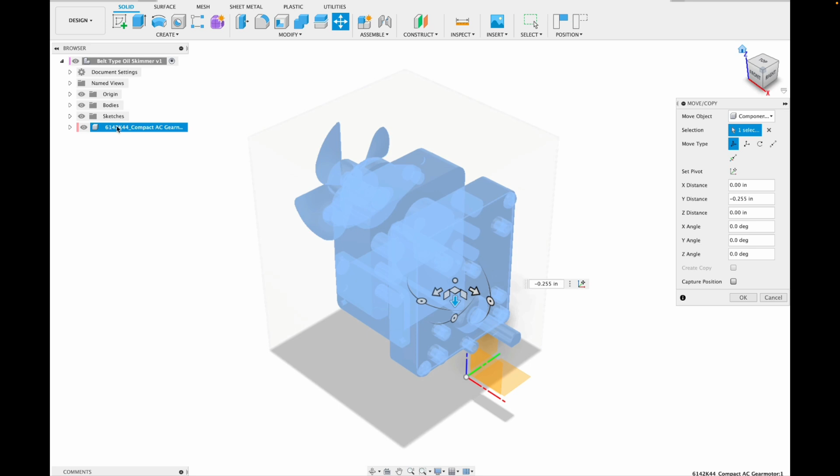For now, I want to make it clear so I can move the gear motor exactly where I want it and see inside the box. Need to leave room for my on-off switch, my strain relief. Want to keep the wires obviously away from the little cooling fan. I'll go down to metal, under the render tab, steel.

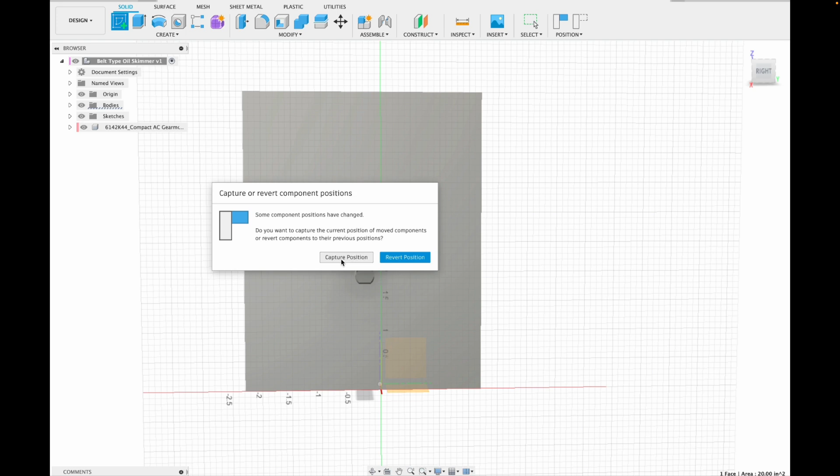And now using the shell command, we've turned it into a shell or a box. Woo! This gear motor is face mounted, so it will mount to that front wall or back wall of that metal box. It's creating an opening for the shaft to stick through. Okay. Again, trying to get it located where I want it.

I'm going to do a sketch on this face and create some through holes that the mounting screws will go through. That will actually mount the gear motor to this metal housing. There we go.

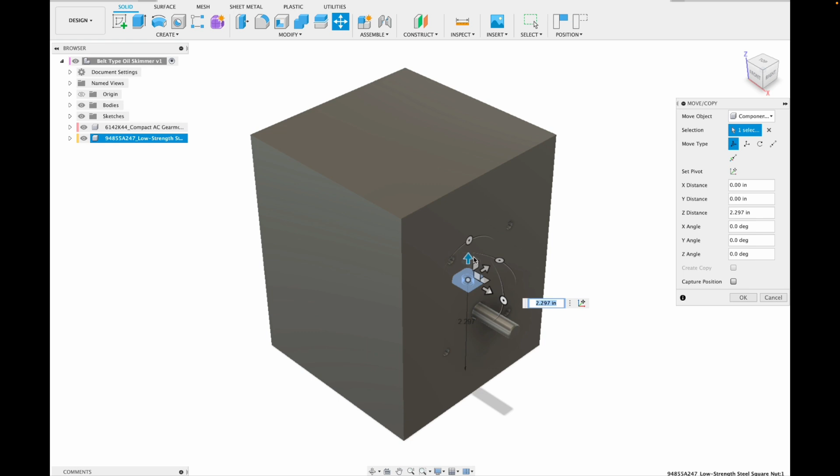And I want to create an access cover on this back side. So I'm going to bring in some square nuts, and the square nuts will get spot welded to each corner inside of the metal housing, and that will allow bolts to bolt the access cover to the housing. So there's our square nut. I'll get it placed about where I want it. And again, that'll get tack welded or spot welded to that metal housing on the inside there.

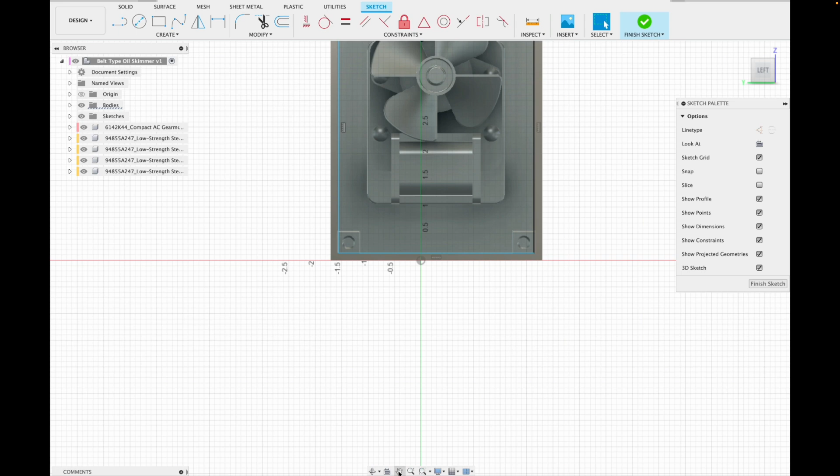And then I'll simply copy it because I need a total of 4 of these square nuts. There we go. You can see I installed them recessed 1/8 of an inch to accommodate or allow for the cover plate. Now we'll extrude out a cover plate. And make sure I say new body. Okay, 1/8 of an inch thick. And that looks good.

Now we'll hide that body that we just made. And in the render tab, I'm going to add some color to our gear motor. And to the housing, we'll paint it blue. There we go.

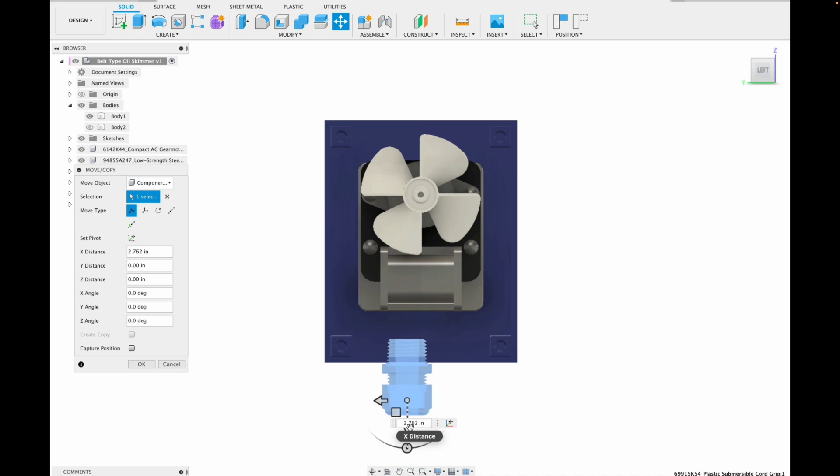Now I want to add our cord, our power cord strain relief. Great thing about McMaster-Carr, or there's other libraries where you can bring in 3D files so you don't have to 3D model every nut, bolt, screw, washer, etc. It's a huge time saver.

So there's our strain relief for the power cord. Just kind of placing it where I want it. I think I'm happy with that. It leaves room for the cord to safely come in the box. We'll paint it black. I want to bring in the on-off toggle switch.

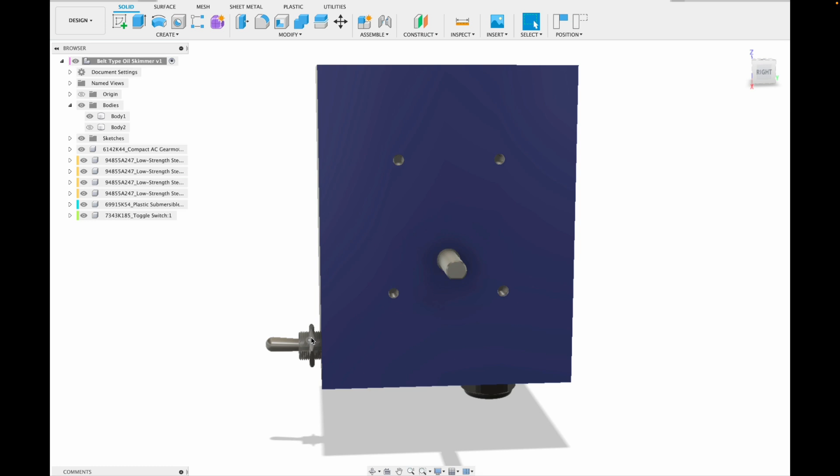And I'll just place this toggle switch where I want it to go on the side of the unit. Again, making sure I leave room for the wires inside. That looks good. Tighten our mounting nut down. There we go. In the render tab, I'll paint the body of the switch black. We'll paint the terminals copper. Chrome plating for the switch and nut.

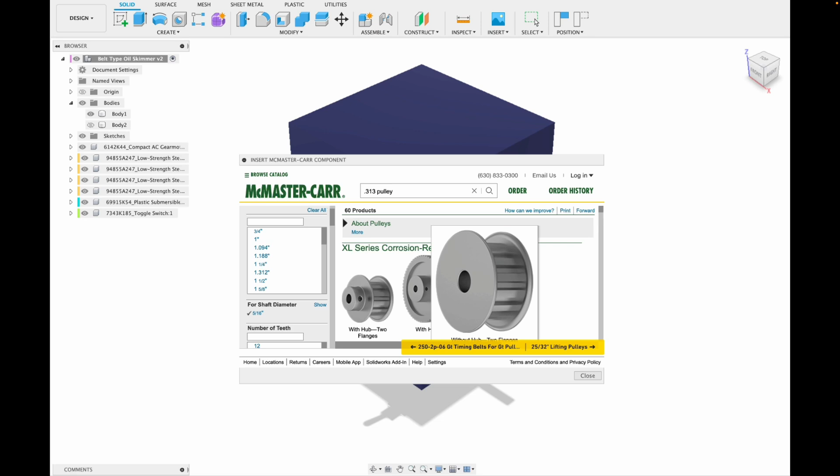So I'm going to look through their pulleys and see if I can find one that has the right dimensions for what I'm looking for. If not, I'll simply make my own pulley. So in the sketch, I'm going to go ahead and create a circle. This will be the inner diameter of the pulley. Making a second circle, this will be the outer diameter of the pulley. Finish sketch. Click extrude. We'll extrude it out to the width that I want.

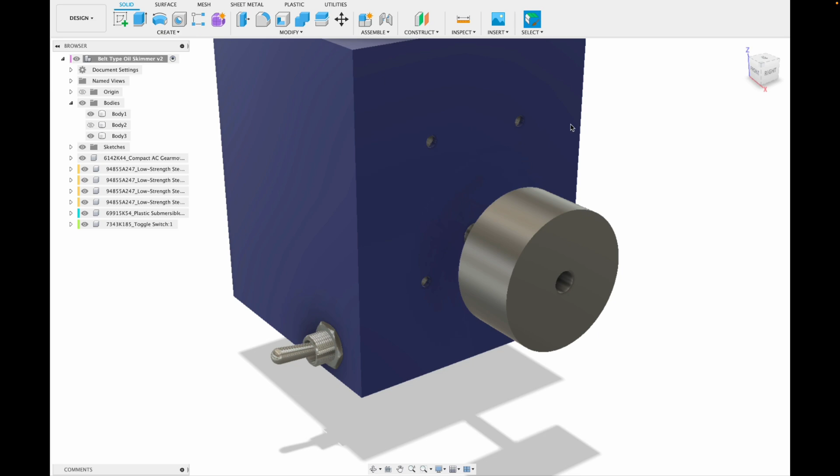I'll need to create obviously some raised shoulders or flanges on both sides so the belt stays on track. So I'll create another sketch on that face and create that flange, extrude, new body. I'll simply copy that and move the copy over for the other side of the pulley, like that.

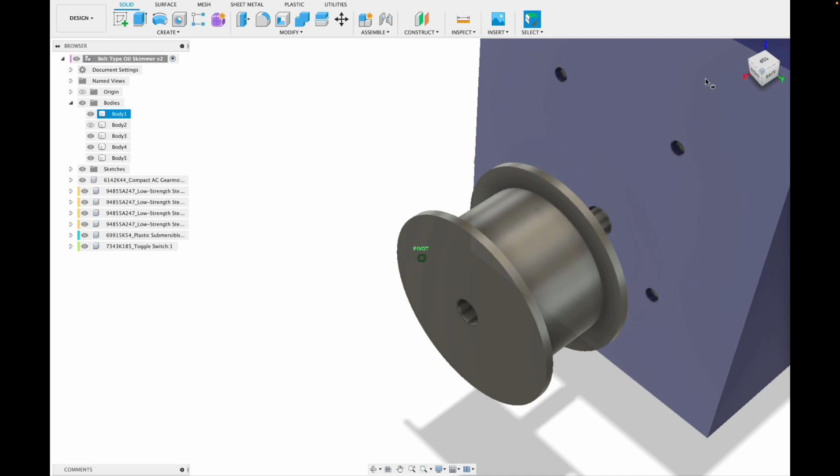I think I'm going to adjust the sketch, go from 2 inch to 1.75 inches. Yeah, that looks better. I'm happy with that. I'm going to construct a tangent plane, and I'm going to create the spikes on this drive pulley that will engage the perforated belt.

So the reason I'm creating a spiked drive pulley and a perforated belt is when the belt is covered in oil, it's going to be slippery, and I want a good way to securely grab that belt and pull it around the drive pulley. Thought about a round nub like this. That's another option, but I think I'm going to go with the spike idea instead.

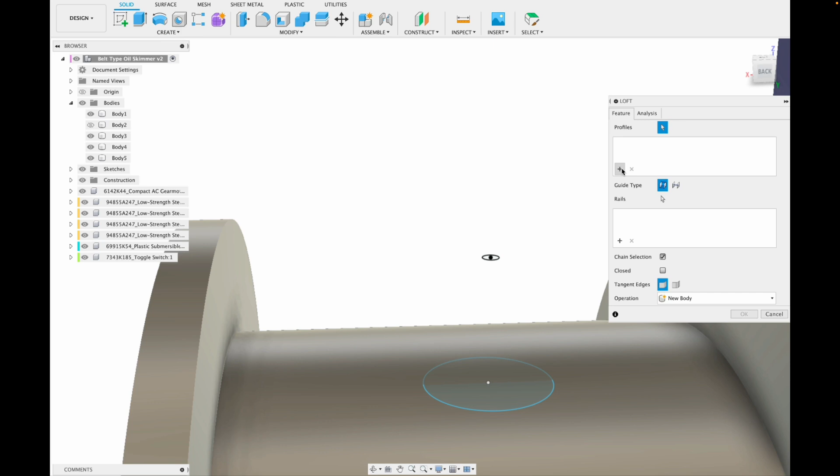So I'm going to create another offset plane from that circle and then create a tiny circle which will be the top point of the spike. Then we'll use the loft command. We'll select our 2 circles and it creates that new body for us. There we go. Going to select the body, get it centered where I want it.

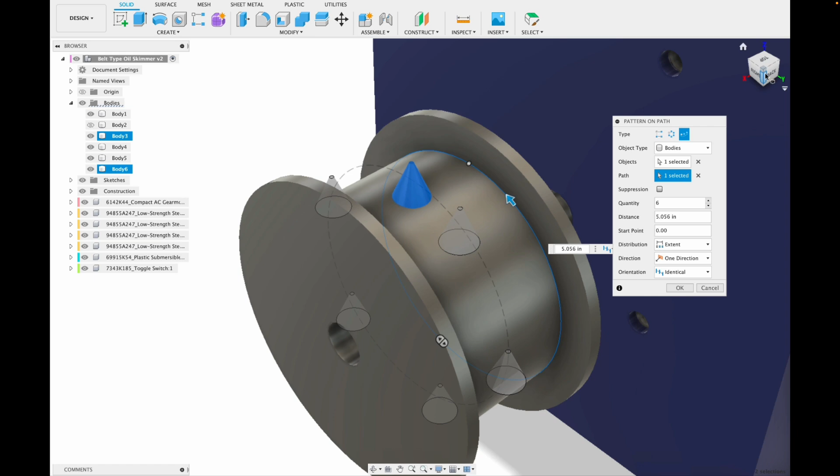And then I'll simply create a pattern with this one spike around the entire drive wheel. So pattern, pattern on path, select the body, select the path. I think that'll be too many spikes. And I need to select path direction. There we go. So they're properly orientated.

I think I'm just going to go with 4 spikes. Yeah, I'm happy with that. So that will engage our perforated belt. And our belt will be made from an oleophilic material, which means it attracts oil. The oil will stick to it, saving our work as we go.

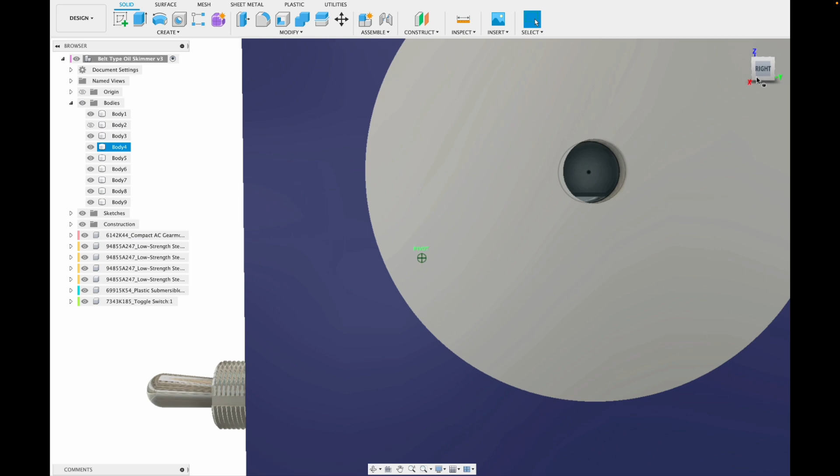I'm gonna move that drive pulley in a little bit closer. Yep. I could extrude that drive shaft out, but I don't think I'm going to do that. I'm going to keep it stock, and I'll simply bring in a set screw that will engage that flat spot on the drive shaft. Yeah, that's what I'll do. I won't extrude that, because again, I'm trying to keep everything as stock as possible.

Go up to insert. I'm just taking a measurement. So yeah, insert from McMaster-Carr, a set screw, cup point set screw. Go with a small one, stainless steel.

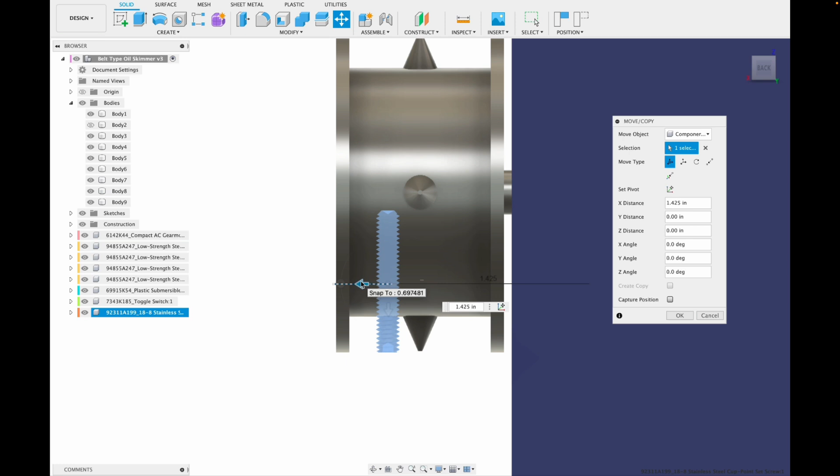This is for demonstration purposes, so I'm not going to waste your time creating a new hole in this drive pulley. I think you get the idea. Set screw holds the drive pulley to the drive shaft. There we go. Rotating those spikes around to allow room to access that set screw. There you go. Now you can access that set screw.

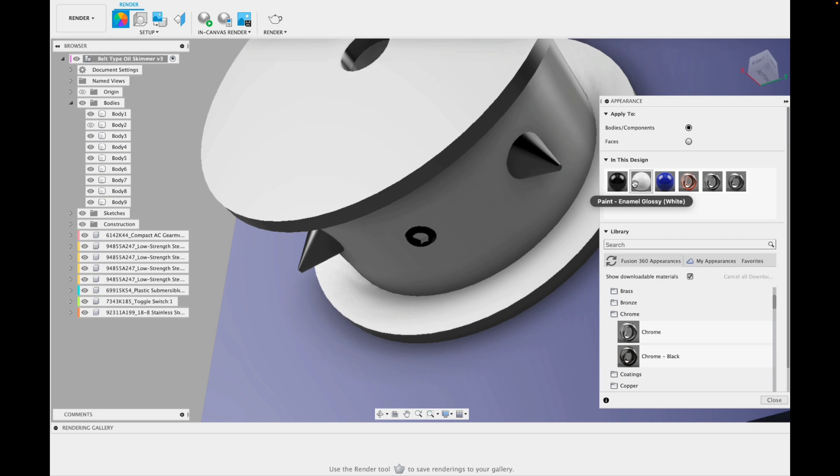Now I'm simply making a copy, moving the copy down. So we just created our idler pulley. The idler pulley will sit inside the body of water, and it does not need spikes. I think I'm going to paint these pulleys yellow so they pop on the screen more, make them more visible.

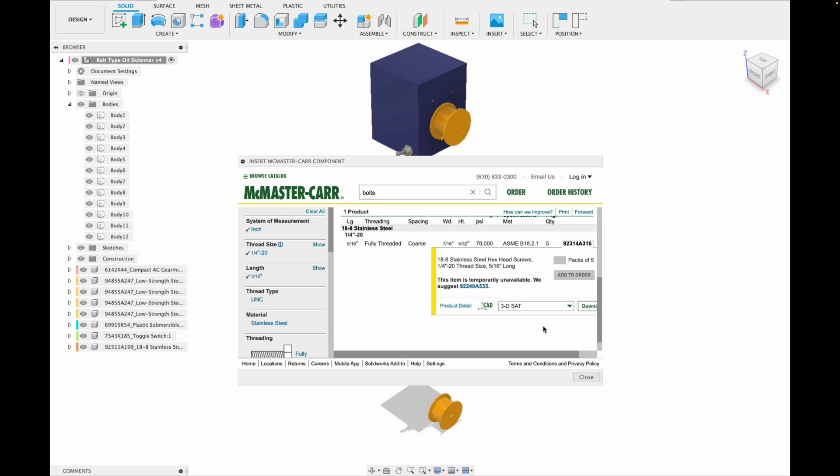Looking for some bolts. So I'm just adding the mounting bolts that will bolt that rear cover plate to the body. And then same thing, I'll create a copy of that one bolt. So we have a bolt on all 4 corners. Again, just simply using the move command, selecting copy. Looks good.

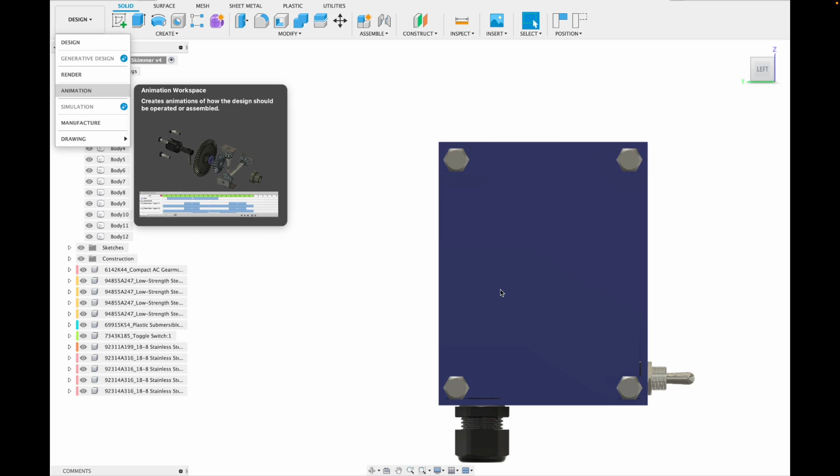Create a sketch on this back plate and remove some material because I want to have a vent, because this motor will get hot if we do not have a vent. So we need to allow this cooling fan to spin, allow the motor to breathe. So then I'll simply cut material. There we go.

And then I'll add some fins on this face. I'll create one fin, extrude it out. Say new body. And then I'll rotate it about 15 or 20 degrees, place it where I want it. And then I'll create a pattern of that one fin all the way down once I'm happy with this one.

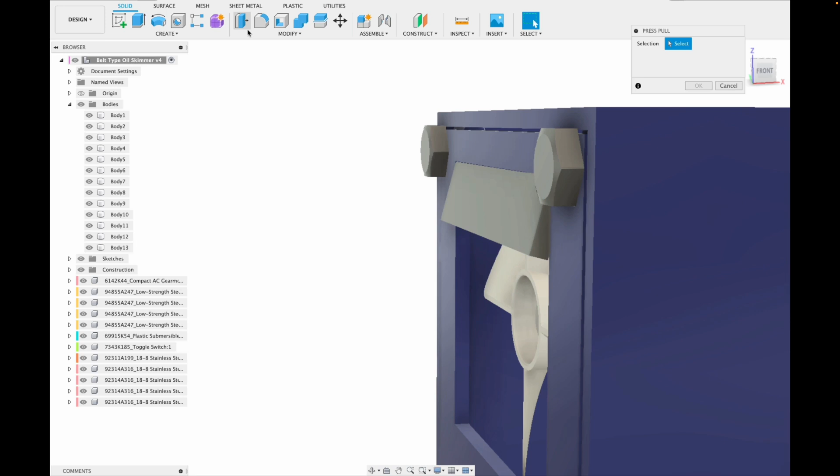I want to make it a little bit thinner. Yeah, that's better. Position it where I want it so we get good airflow. A little bit more of an angle. So the idea is you want to keep rainwater out of the unit, but still allow it to breathe.

You can see I'm just using rectangular pattern. Select 5 for quantity. I'm happy with that. So in render, we'll paint that grill or that vent or those louvers blue. Okay.

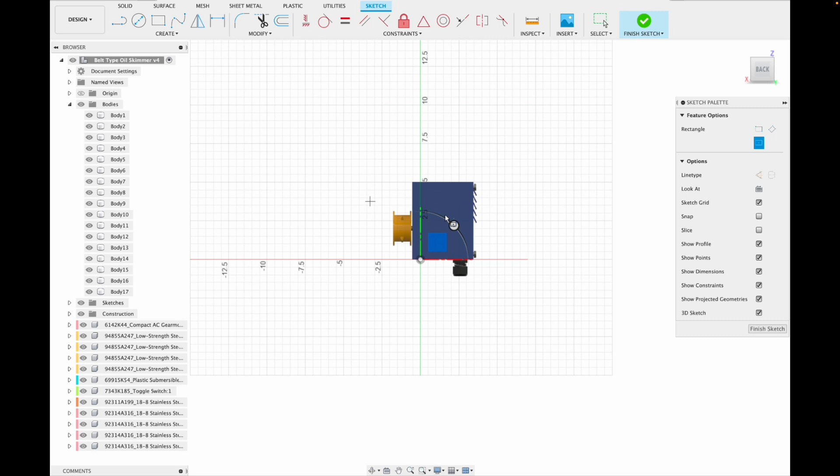And then I'm going to make a sketch on this other side and extrude out some 1.5" square tubing that will be welded to the box. And this will be the actual mounting leg for the unit.

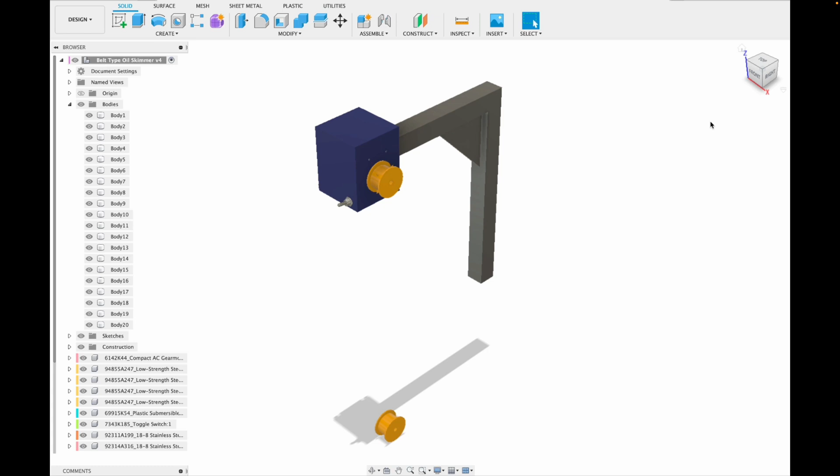Then we'll do a sketch and create a gusset in this corner for structural integrity. I'll create another sketch and we'll cut out that material. There's our gusset. Now on this bottom of the leg, I'll create a mounting foot or mounting plate at 1/4 inch steel. Yep. And then we'll paint everything blue and render. I think I'm happy with that.

I'm going to find some countersink stainless steel screws that will actually attach that gear motor to the metal housing. There we go. Now I'll simply select that component, make a copy, move it over for that other hole. You get the idea.

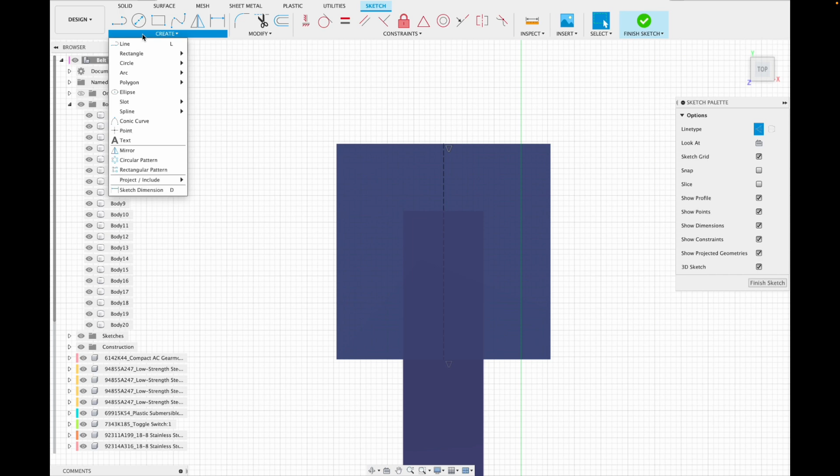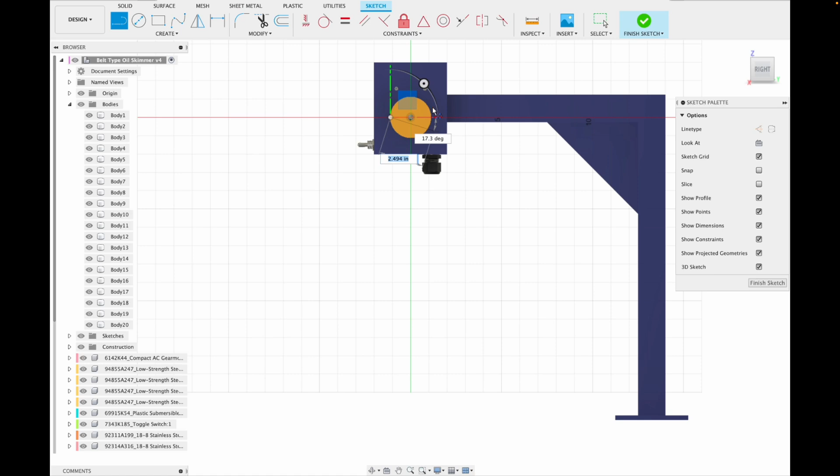Now we'll create a sketch on that mounting plate using construction lines, and then we'll remove material or drill our holes for our concrete anchors to go through. There's our 4 mounting holes. Use the extrude command, cut. There we go. Creating a plane. And then create a sketch on that plane. And this sketch will become our actual perforated belt.

The program's running a little slow.

So the way I'll create the belt is I'll create a circle at the drive pulley and then a circle at the idler pulley, and then I'll connect the 2 circles with straight lines, and then I'll remove or cut the lines that I don't want. So it's going to be like a big oval shape, if you will.

And for some reason at this moment, the program is running a little bit slow. It's a cloud-based program. There we go.

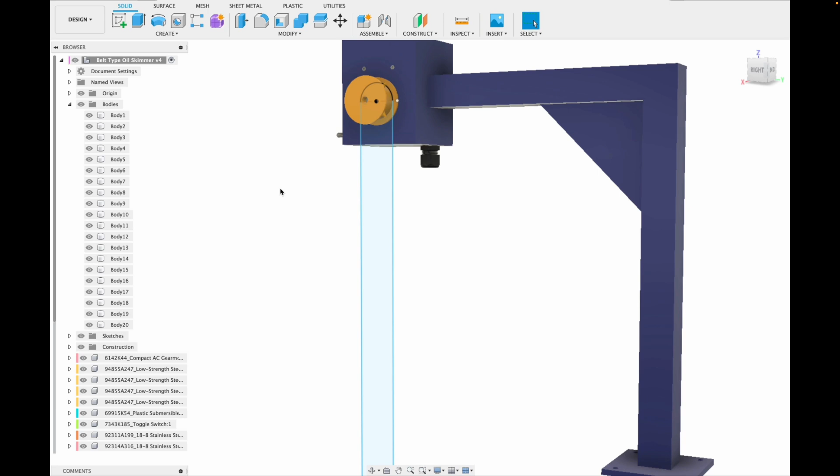Now I'll extrude that out. And that's going to be our belt. You can see I got the belt a little bit too small. So I need to make those circles slightly bigger. Can't wait for it to catch up. There we go. Again, draw my two lines down to connect my two arcs.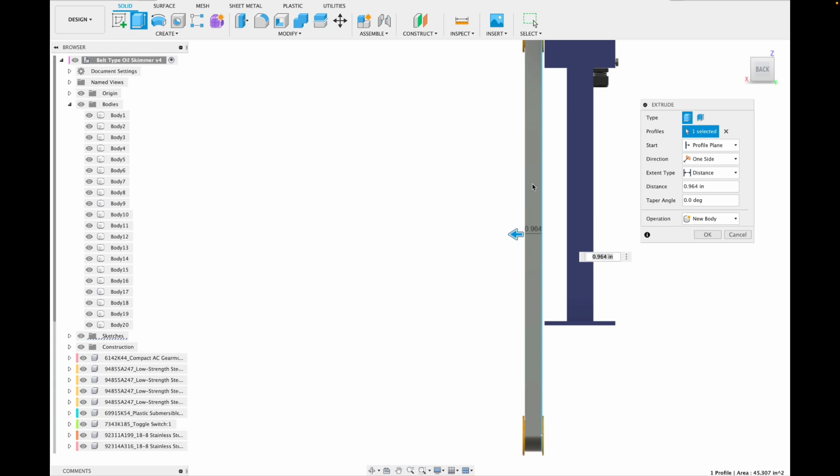Let's remove the material I don't need. Finish sketch. Use the extrude command. Say new body. Yep, that looks perfect. Then we'll hide the items we don't want interfering, and then we'll use the shell command. There we go. So that's going to be our belt.

Move the belt out of the way, and I'm going to cut out that back section. So now we have an actual belt. Now the belt can be made of stainless steel, polypropylene, polyethylene, etc. It needs to be an oleophilic material that oil will stick to. And create a tangent plane off of that drive pulley.

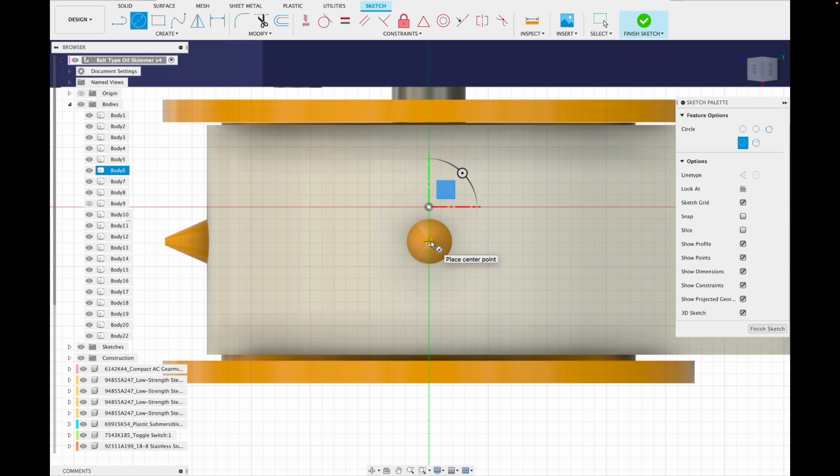What I want to do is punch holes in the belt now to make it an actual perforated belt. So I'll hide that cone or that spike. We'll extrude out, and there's our hole. So you can see how that works now. I'm going to pattern that hole around the entire perimeter of the belt.

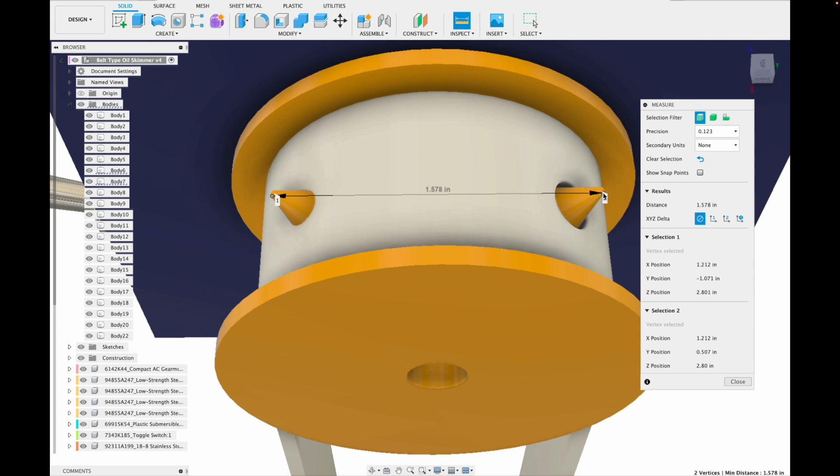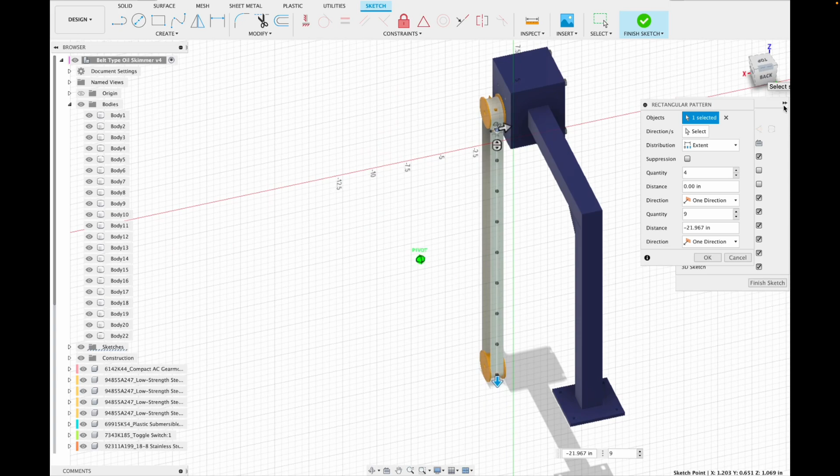Just want to take some measurements to see what that distance is between the two spikes. And from there I'll create a sketch on the side of the belt. Apply my measurement. Then I'll make a series of holes on one side of the belt, and then we'll use the extrude command, cut, to remove material to make the actual holes. And I'm using pattern to space out my holes evenly. That way our holes engage with the spikes on the drive pulley properly.

So that bottom pulley, you can call that an idler pulley or a tensioner pulley. Maybe more accurate to call it a tensioner pulley because that's actually what it does. It provides a little bit of tension on the belt. We'll select all of our holes, click extrude, cut all the way through, and there's our perforated belt. Happy with that?

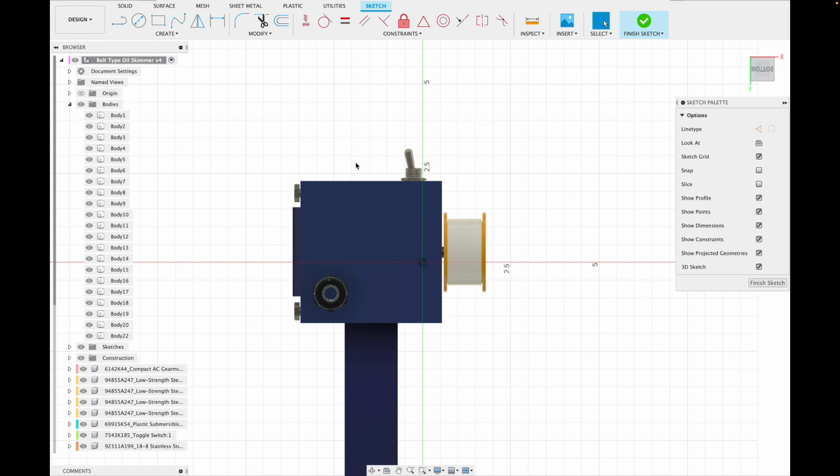Now I'm going to create a sketch on the bottom of the unit. And we're going to create the scrapers and the angle iron trough that will direct the oil that is scraped off the belt into a collection vessel. So again, extrude. I'm going to make it out of 1/2 inch square tubing, cut it in half to give me my 1/2 inch angle iron. Do a sketch, draw a line across diagonally, and cut out the material I don't want.

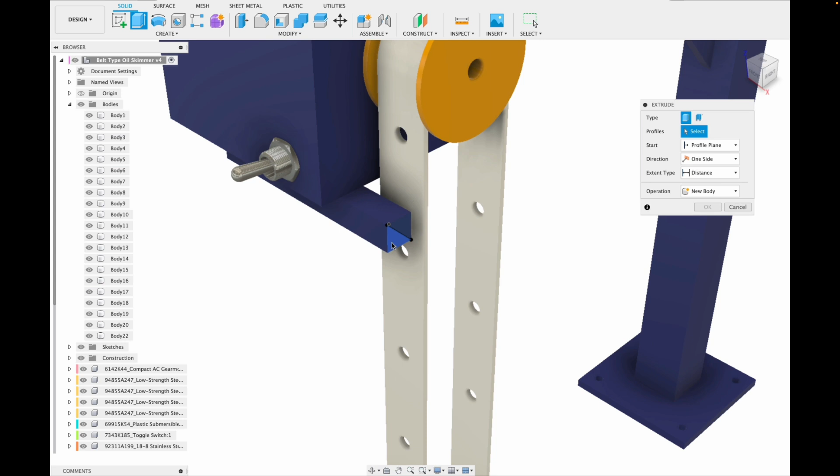And then we'll use the shell command to make it an actual piece of angle iron. That one was a little too big. There we go. Make it just slightly smaller. Again, shell command. There's our angle iron, and then we'll rotate that body around. There we go. Place it about where I want it.

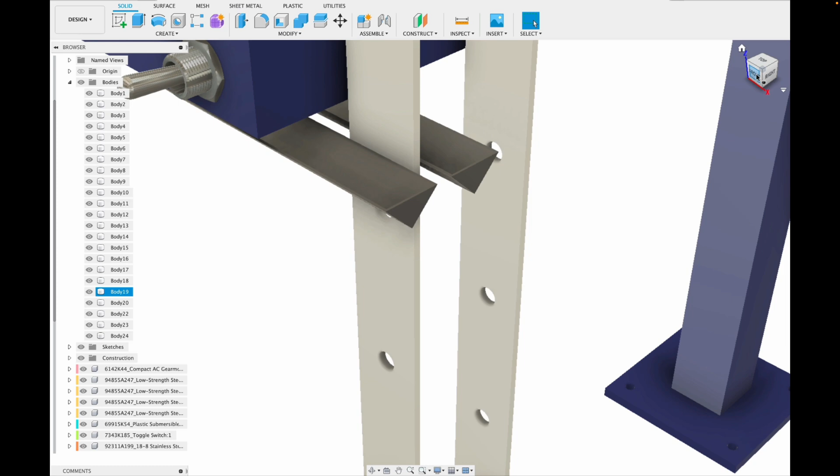So the theory of operation here, as you probably figured out, as the belt slowly turns around, it picks up the oil off the surface of the water. The oil comes around the drive pulley, and the oil will get scraped off by the scrapers I'm making right now, and then the oil will run down those angle iron channels into a collection vessel, and then the process repeats itself.

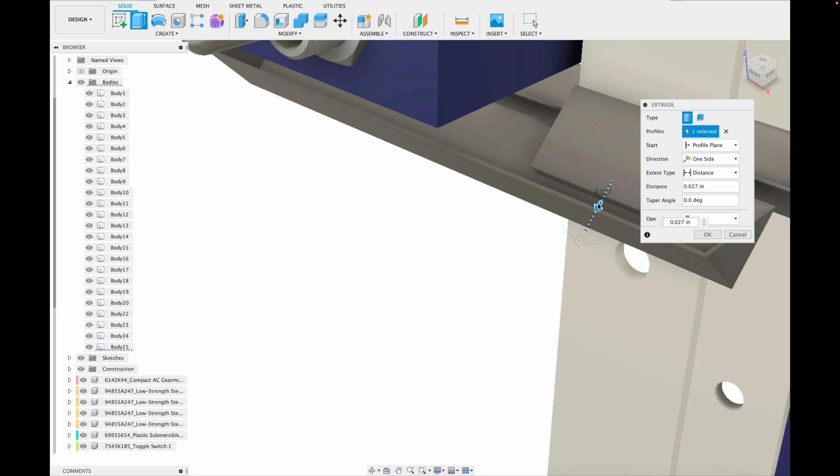And the scrapers can be made out of a rubber or polypropylene, etc. The scrapers need to be close enough that they gently remove the oil off the surface of the belt, but not so tight that it damages the belt or causes the belt to bind. So again, I'm just trying to match the profile of the belt and the scraper. Place it where I want it. And the scraper would simply be screwed to the angle iron.

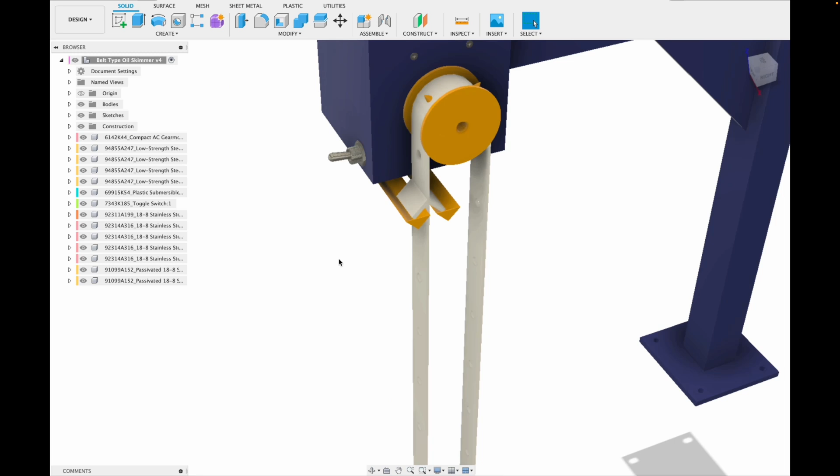And I'll just mirror that scraper. I'm happy with it. So there's a second scraper right there. Move it over where I want it to go. And then I think from these angle iron channels, I'll divert the flow of the collected oil into a piece of pipe, and then from the pipe into a collection vessel. And again, everything will be obviously welded together. Saving my work as I go.

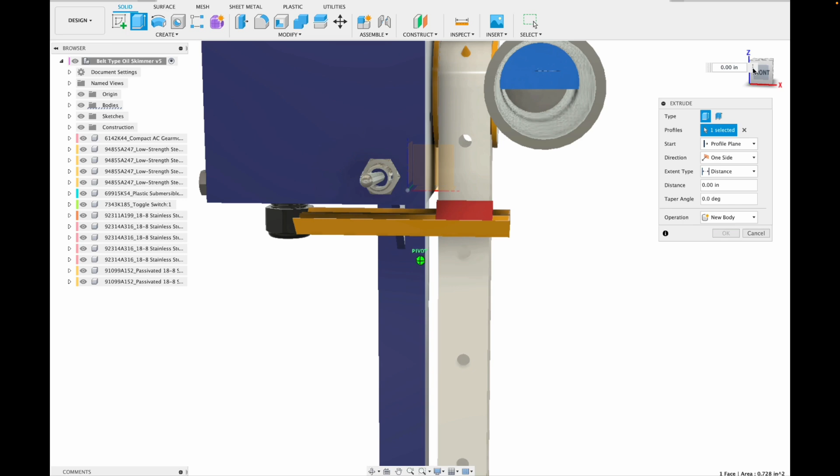So now I'm going to extrude out a new body. This will be our pipe. And draw a line across it. I'm going to cut some material off, not all of it. And then we'll use the shell command. I'll extrude out that last little bit with the cut command. There we go. Oops, a little too much. There we go. So you can see the oil will be diverted into that pipe and then ultimately into a collection vessel. And so that piece of pipe and the angle iron troughs will be spot welded together.

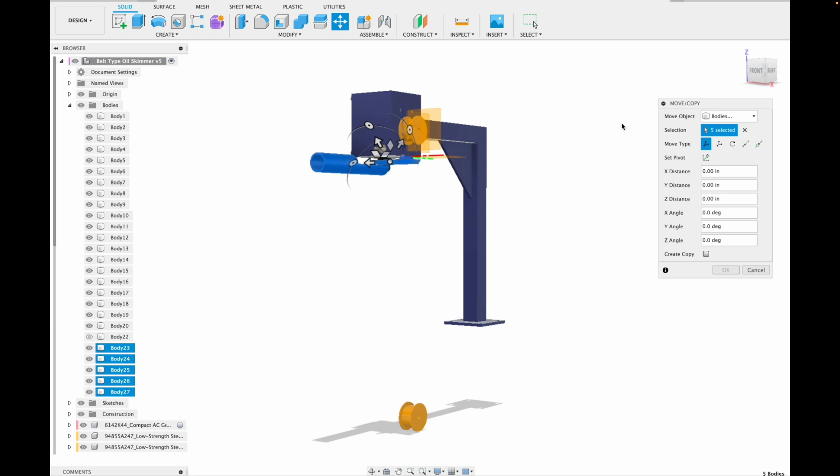And then I want to angle them slightly down and away to facilitate the flow of oil. So you can see there's a slight angle to them now, slight pitch. Don't want it to be too extreme, just a tiny bit. Yep. That should work just fine. Just want to move this where I want it. That's better. The pipe's a little long. I'm going to remove some material.

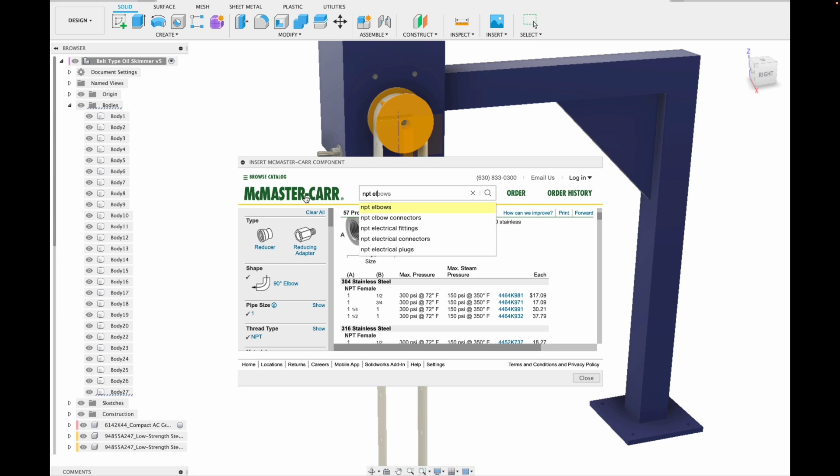Now I want to insert a pipe elbow. And that will direct the flow of oil into our collection vessel. Get it orientated how I want it. And again, these will be welded together. Okay. Happy with that. We'll paint it yellow.

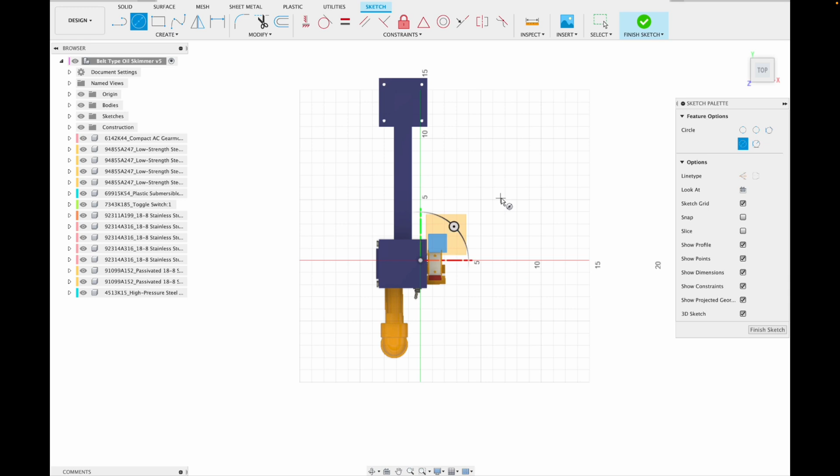So now we need to create a collection vessel, which essentially will be a 5-gallon bucket in this case. So again, extrude. Use the shell command. Okay. Place it about where I want it. Oops, I accidentally cut through my pipe there. I need to fix that. So just undo. There we go.

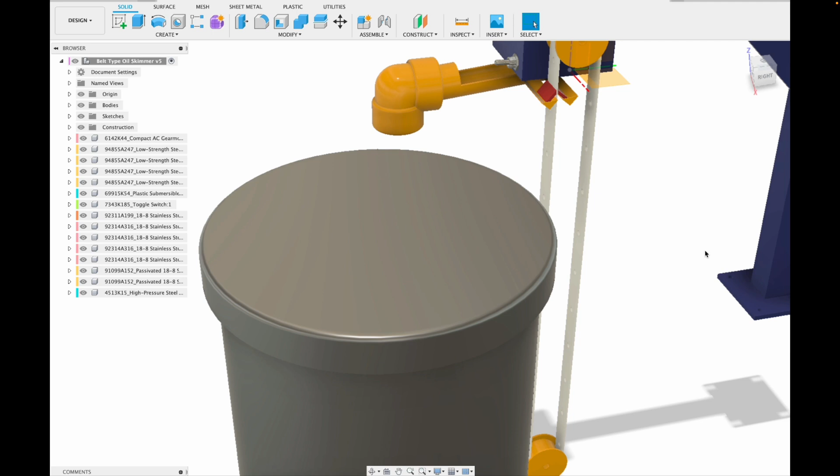Now I'm going to create the lid for the bucket because we obviously don't want rainwater or bugs or animals getting in the bucket. Extrude, and I'll bevel the bucket lid. And we'll place the bucket where we want it. We'll bring in a small short pipe nipple. Okay. And then we'll create a small hole for the pipe nipple to go through the lid.

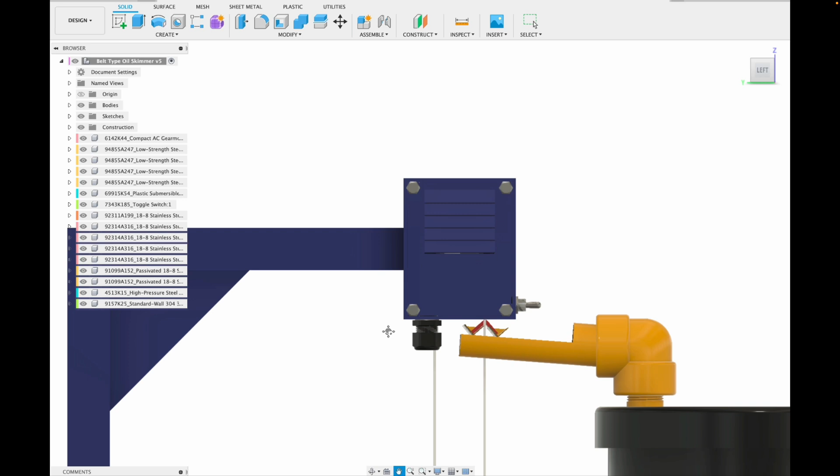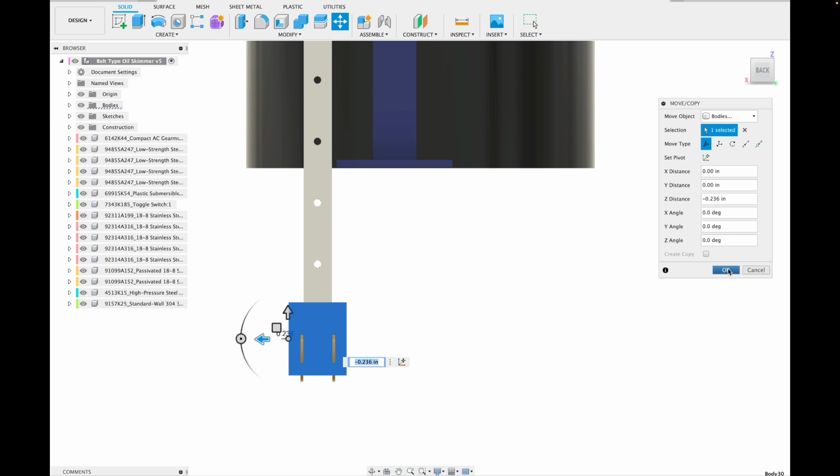Or you could use a union or a bulkhead fitting, but for this demonstration, just a simple hole. Almost done. Next, I'm going to move these 4 bolts so they're flush. There we go. And now I want to create the yoke for the idler tensioner pulley down here. This will give the pulley something to mount to. Using the extrude command, move it where I want it, I can resize it. Looks better.

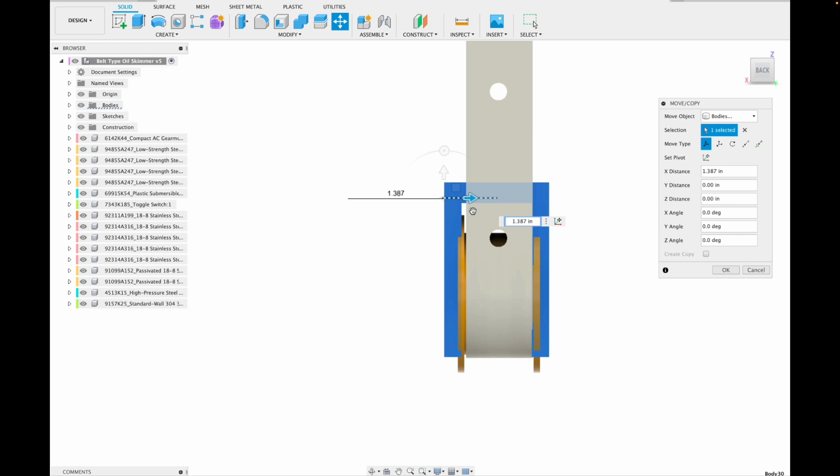I need to remove material from the center to allow room for the pulley. So I'll create a sketch and make a rectangle. Then we'll use extrude, cut. There we go. I'll move it in place. It's a little bit too thick, so we'll use our extrude, cut on both sides. Perfect. Using the fillet command, I'm going to round these 4 corners like that.

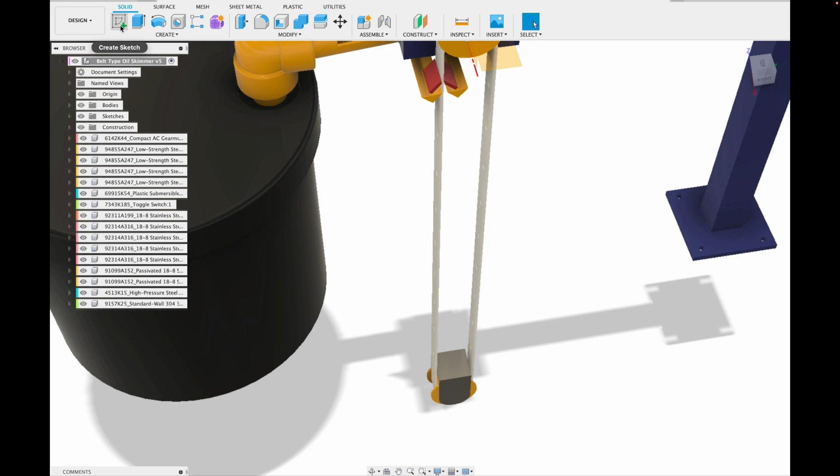And then I think what I'll do is we'll make a sketch on the top of that yoke and extrude up our flat bar, because we now need to make the frame, the flat bar frame that connects this yoke to the bottom of that metal box. And we need to make it adjustable so you can adjust the tension on the belt. I'm drawing a rectangle. We'll extrude the rectangle up. There's our piece of flat bar.

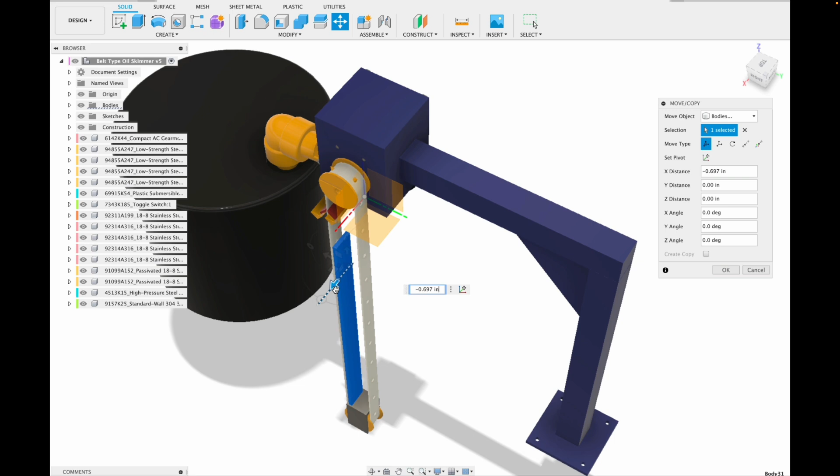Okay. I want to rotate it. That's better. Somehow I lost my radius. There we go. I'm going to copy this piece of flat bar to make our second piece of flat bar. They'll be bolted together, and we'll slot one of the pieces of flat bar, again to give us that adjustability. First, I'll create a sketch on this piece of flat bar on the edge and extrude it out underneath the box, so it will be welded to the underside of the box. There we go.

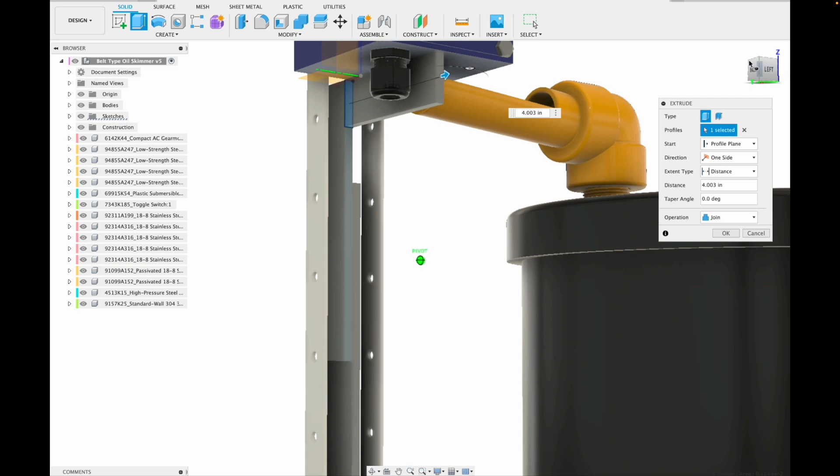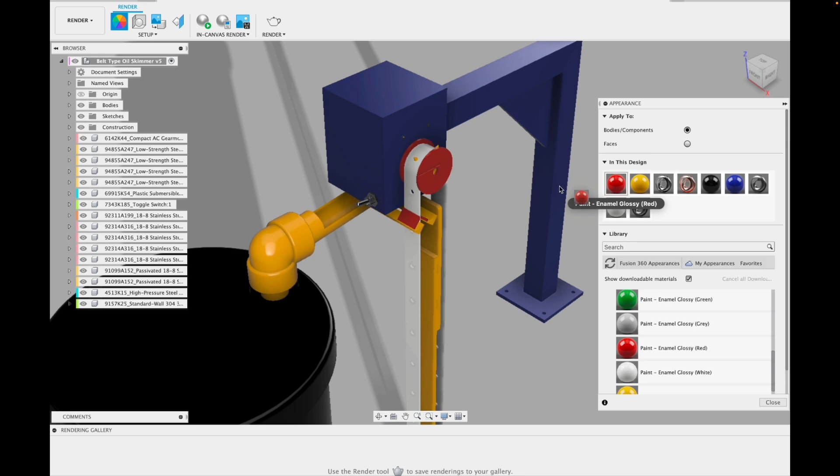And then for additional structural integrity, we'll weld that piece of pipe to that flat bar. Add a radius to that corner. Paint it yellow. I think I might paint the pulleys red so they stand out more. All right.

So I'll create a sketch. We'll turn off some bodies so we can see what we're doing. There we go. We'll create a sketch on this face of the flat bar, and that will be the sketch that is the slot. So again, basically 2 circles and then 2 lines connecting the 2 circles to make our slot. There we go. And then we'll cut out the lines we don't want, like so.

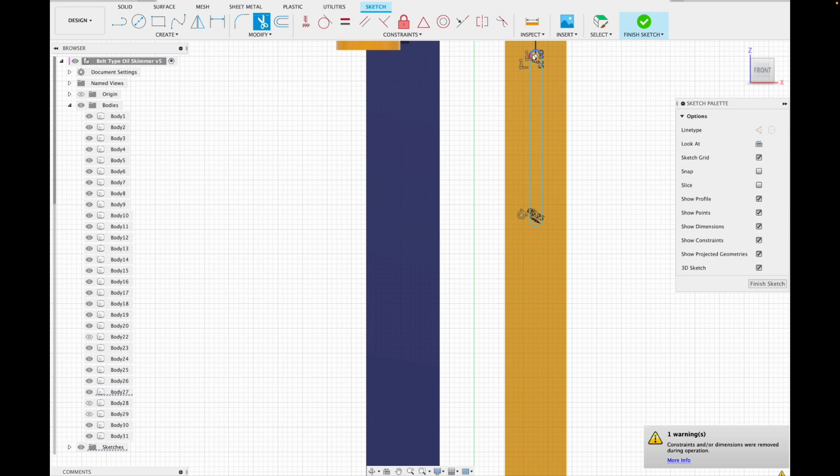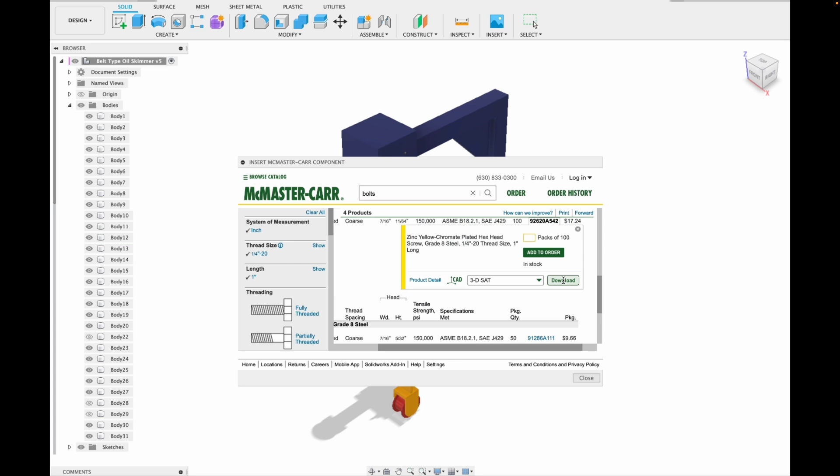So finish sketch, extrude. I don't want to go all the way through. Using the cut command, go through 1/4 inch, and there's our slot. Then we'll create another sketch on the other piece of flat bar to have through holes for the bolts to pass through. Then extrude, cut. There we go. Then we'll bring in some nuts and bolts to bolt them together. And I'm going to use lock nuts for this situation.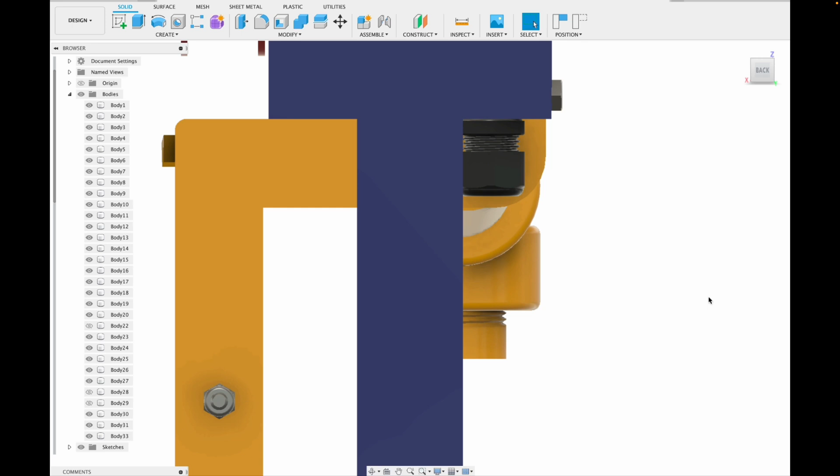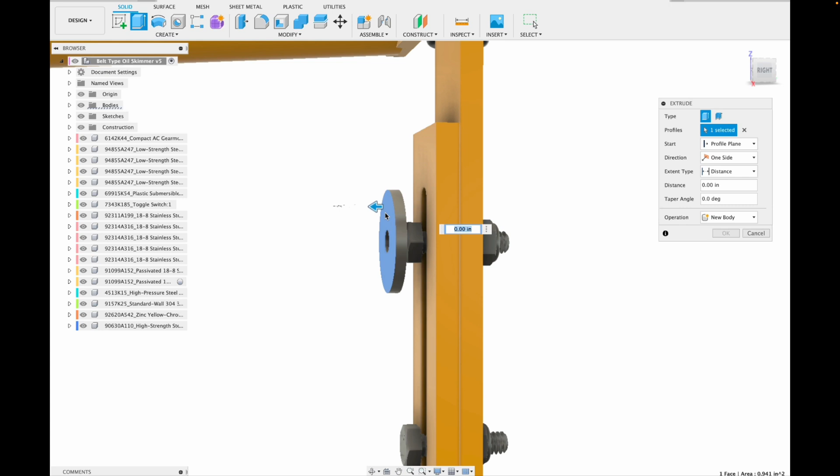And then I'll make my own large fender washers to go underneath the bolt heads. Extrude cut, make them a little bit thinner. There we go. Place it where I want it. Then I'll simply copy that fender washer, move the copy down. There we go.

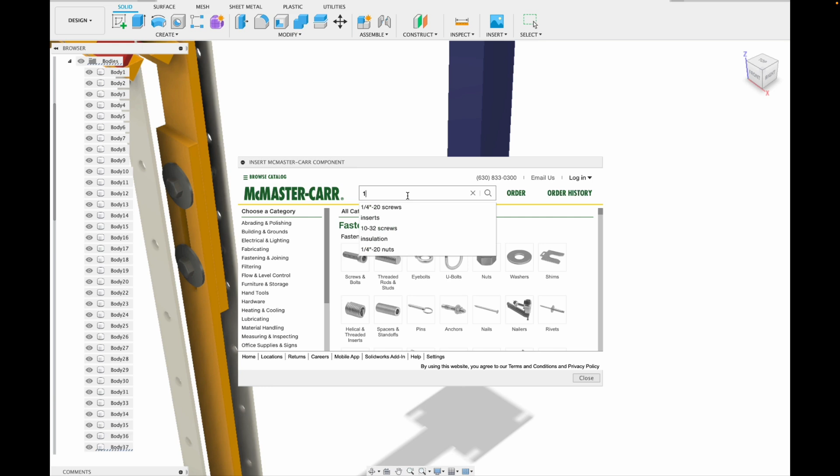I'm going to add a little mounting pin or mounting axle for that idler tensioner pulley to attach it to the yoke. Yep. And we'll add our concrete anchors to mount this unit to the concrete pad. And I'll simply bring in one concrete anchor and then copy it 3 times. That works.

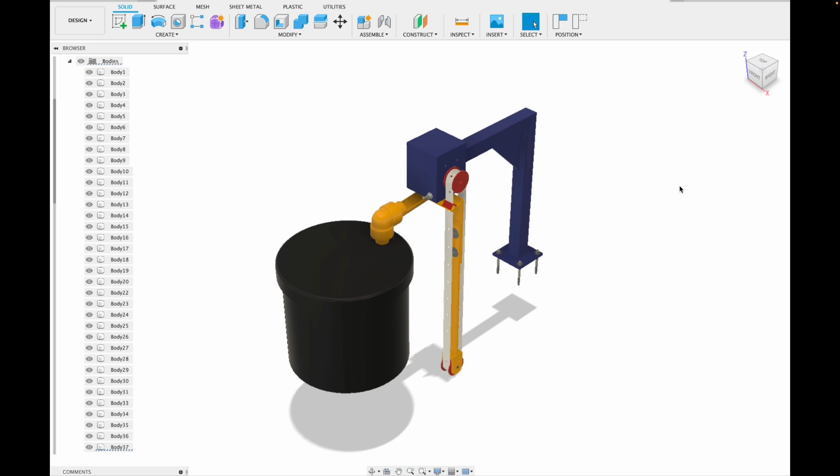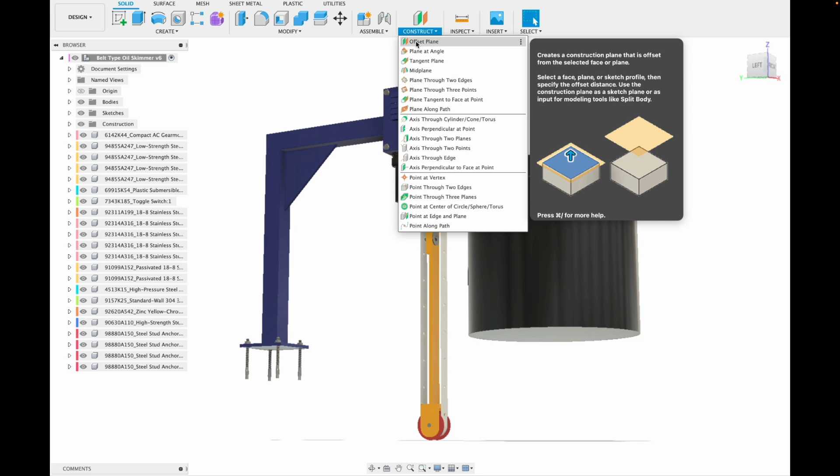So now I want to extrude a power cord and a plug. So make a sketch on that face, extrude it out, my circle, new body in both directions. We'll paint it black. And then I got to figure out how much of the power cord I want to show in this demonstration. So I'm creating an offset plane. So I'll draw a few lines and circles, and then we'll turn those into our power cord.

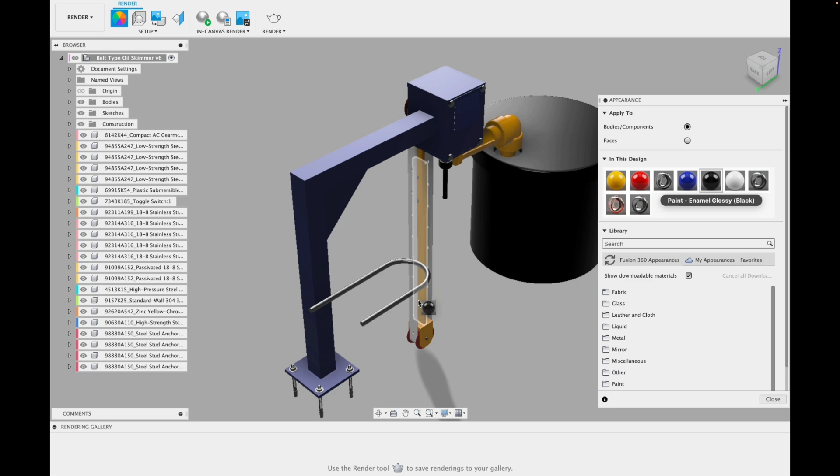And then under the Create, up in the menu there, just taking a measurement right quick. Okay. So we'll use that line that we just drew and create a pipe. And there's our power cord. We'll paint it black. And we'll rotate it around. Again, this is just a 3D representation of a power cord. But you get the idea how this works.

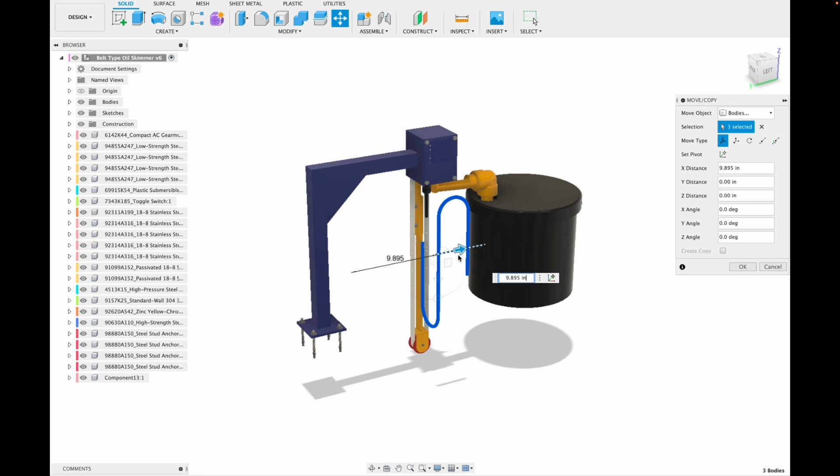Excuse me. I'm just kind of playing with the positioning or placement of the power cord. So when you see it in the isometric view, does it look nice? Yeah, I think that's a little bit too much. I think I'm going to simplify all this and just go with a simple 90-degree bend.

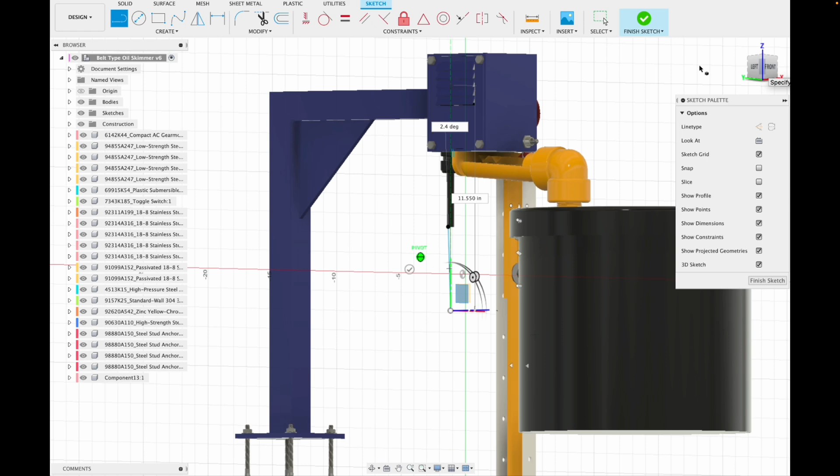So again, constructing an offset plane. Create sketch on that plane. Same thing, draw a line. Oops, my line's crooked. Let me fix that. There we go. Then I'll create a circle to make my radius, and then cut away what I don't want. So there's an issue there I need to correct. Yep. Okay. Now we create pipe. Again, new body. There's our cord. Paint it black. Place it where I want it.

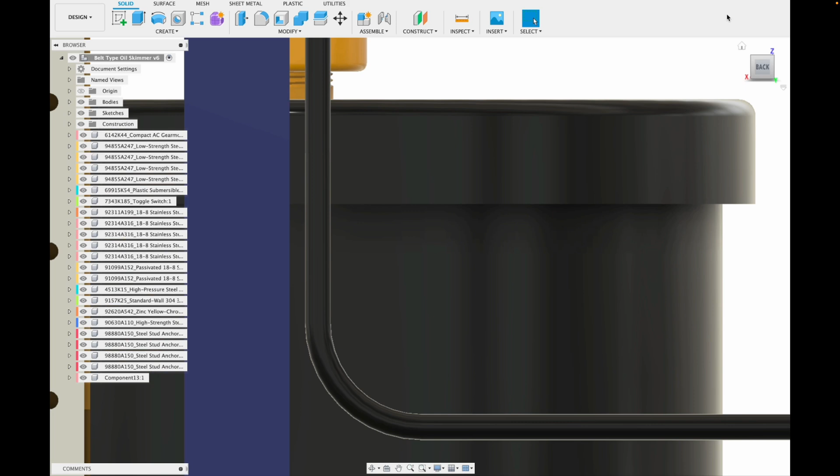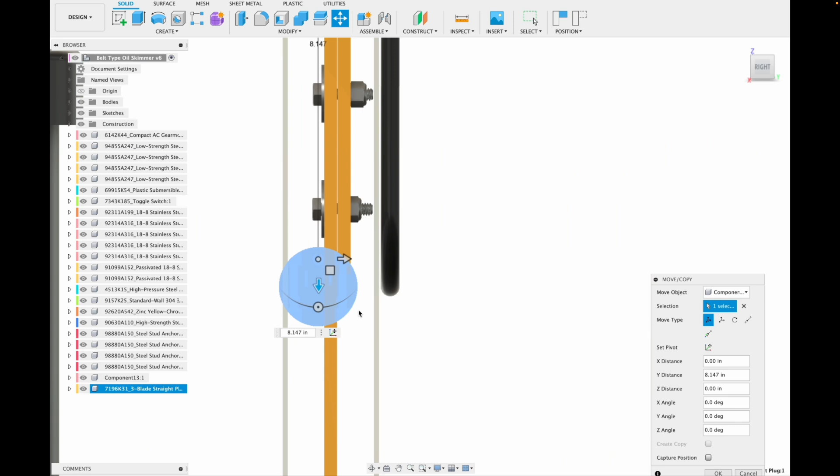And then we'll bring in a male cord cap. The actual plug, male plug, 5-15. Yeah, NEMA 5-15 plug. Place it where we want it. See how that looks? And I add some color to the plug, make it pop. Yep.

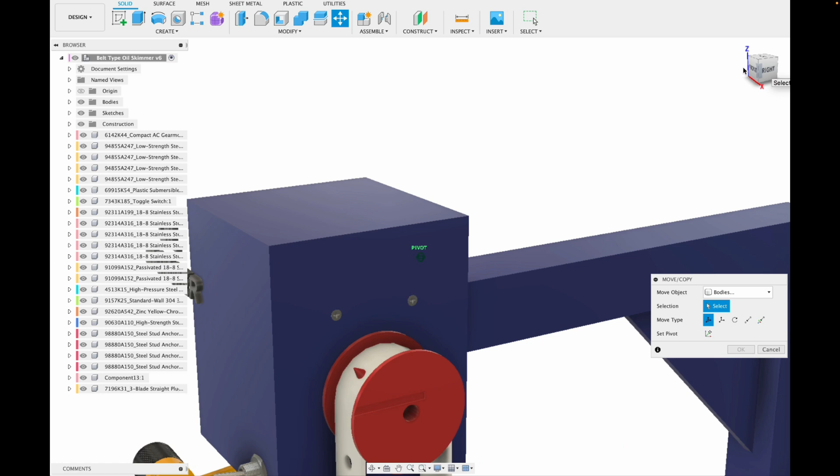I just want to extend that cord, make it just slightly longer. So we'll select that face, extrude. There we go. Yeah, that's better. Then we'll create a sketch on the side of the unit, and we'll add some text to represent a sticker or a decal that says oil skimmer. Then we'll use extrude. Extrude the letters out slightly to make them a new body. Then we'll place the letters where we want them. Then we'll add color.

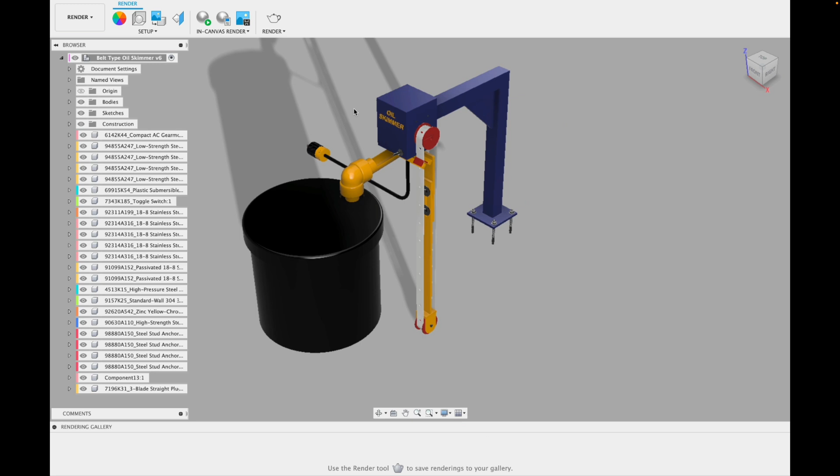So under the render, paint them yellow. Okay. Then I think I'll create a sketch on the top of the bucket lid, and we'll label it used oil. So again, text. Oops. Type in used oil. Okay. And same thing, we'll extrude. And then under render, paint those yellow.

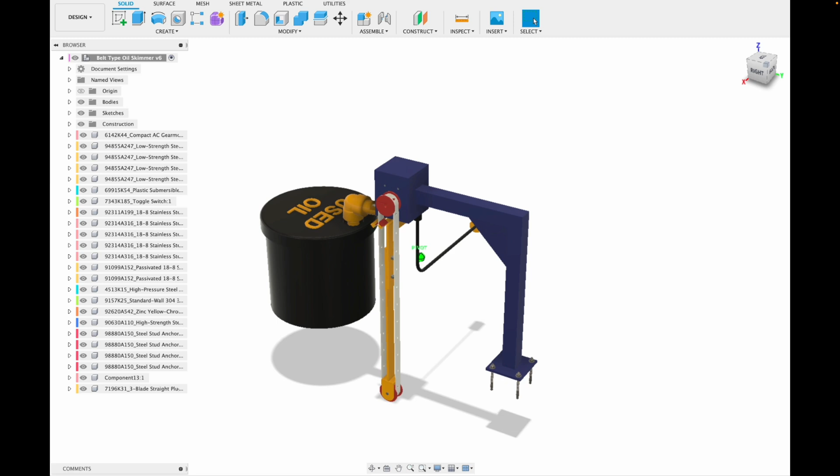Yep. That's about it for this demonstration today. Wow. I hope this tutorial helped. And one final look at our final product. Front view, back view.